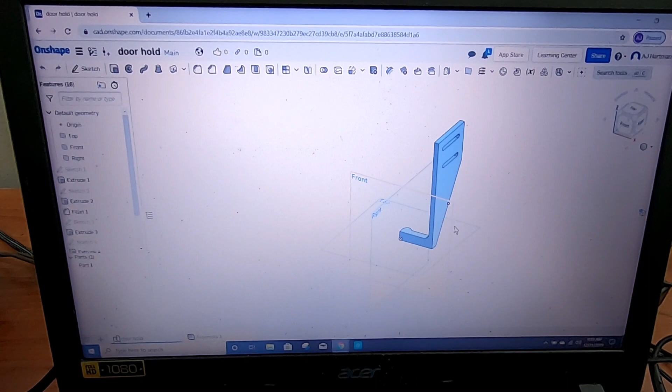A quick example would be this door hold. I was having a problem with the door not staying open against the wall in my shop, so I ended up making this design and then printing out this little bracket. You can kind of see it's pretty much dead on.

So what we're gonna do is search. I kind of already jumped in ahead of time before doing this video. So if you click public, let's search GoPro, and all sorts of brackets and mounts and everything come up.

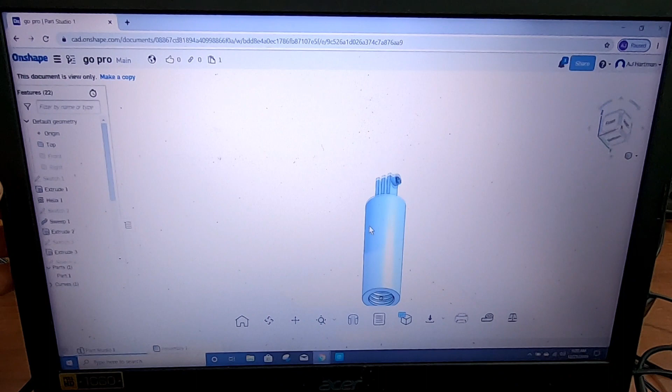Don't really know what you're gonna come across. I originally looked at this one. This one was kind of cool because on the bottom it actually has threads. And looking at the size of it, it's probably like the threads that go on the bottom of a paint pole, like a paint roller. No idea what size or type of threads they are.

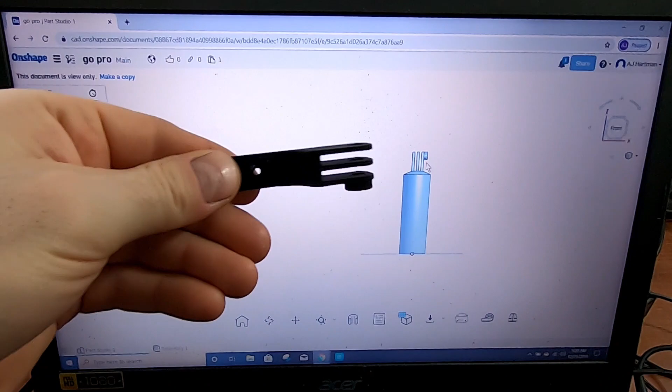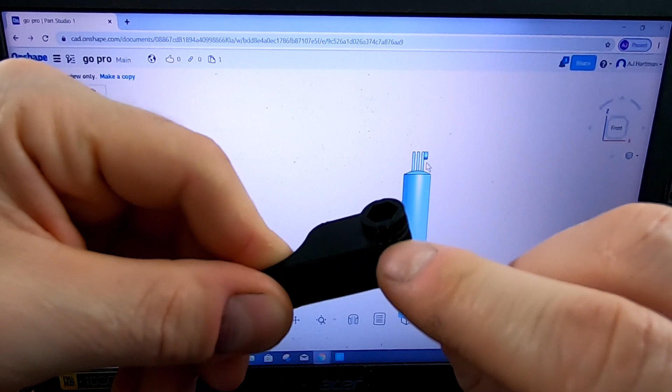The problem with this one is if you look at this overhang right here, I would most likely print it from the bottom up, but this overhang might sag a little bit. A good example of that is these little permanently affixable GoPro mounts that I printed. The bottom of it might be a little hard to see on the camera, but it kind of sagged a little bit right here. Wasn't the cleanest. Wouldn't be terrible, but what we're going to do is find one that might be a little more printer friendly.

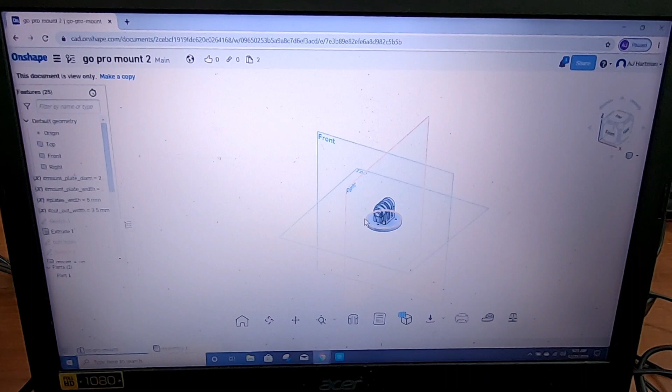And then I noticed this one right here. So what's cool about this one is that in the problem area, you can see they put a nice little fillet or loft or whatever this feature is right here. So when we print it from the bottom up, there's no sharp overhangs or anything.

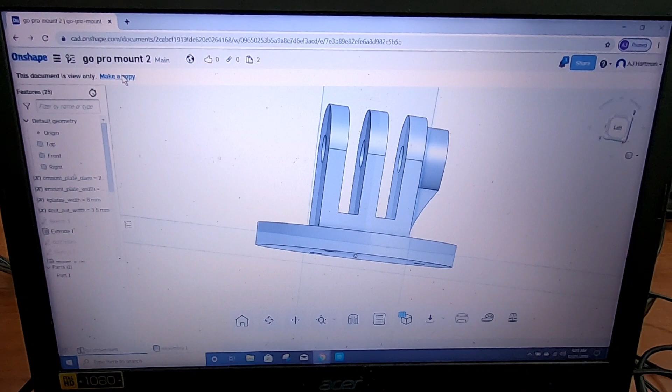So what we're gonna do is make a copy of this one. It tells me to make a public document. And here it is, ready for us to edit and modify as we need.

So let's take a trip back over to our mount, and what we're going to need to do is get an approximate measurement. This doesn't have to be exact, but we're probably going to want it to come out, I don't know, 3 inches before we have the mount sitting there. So this should be pretty easy to modify.

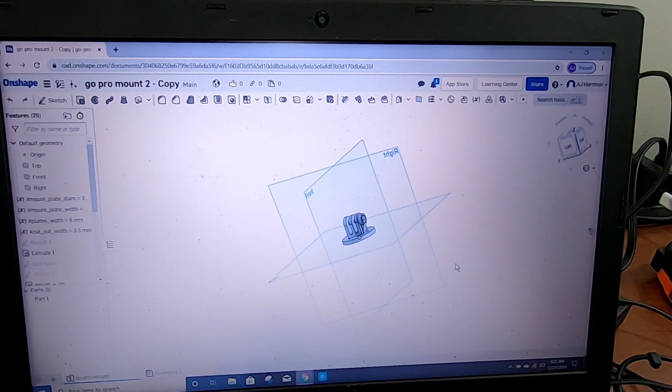Now, I did tinker with this before I did this video just to speed it up a little bit. So what we're going to want to do is add a little bit of height to it first.

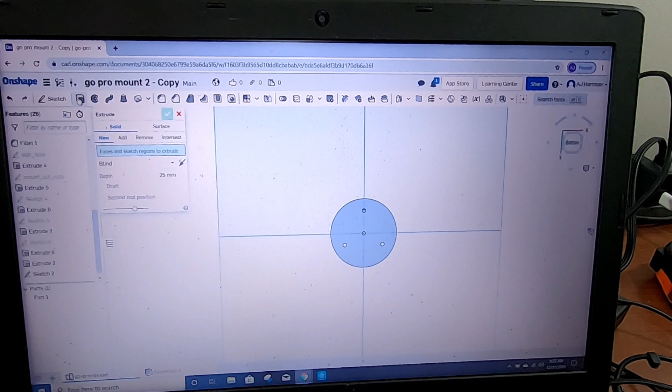We're going to extrude the sketch we just did. I just click over here - you can just click the picture, whatever's easier. Let's bring it up about 15 millimeters. We're going to add it to the existing part, and that's fine.

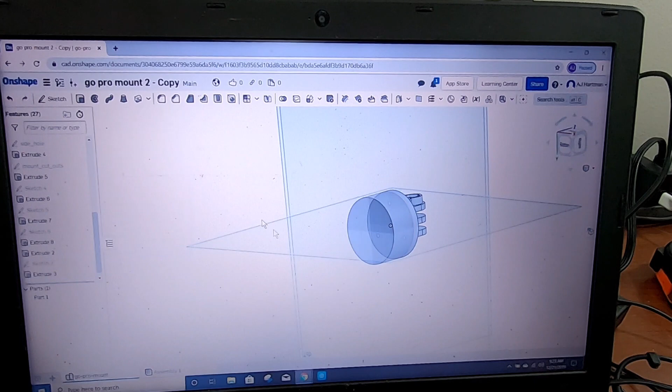Alright, so now we want to make the part of the bracket that comes off of the back and will mount to the tripod right around here. So we know we want it to be about 3 inches.

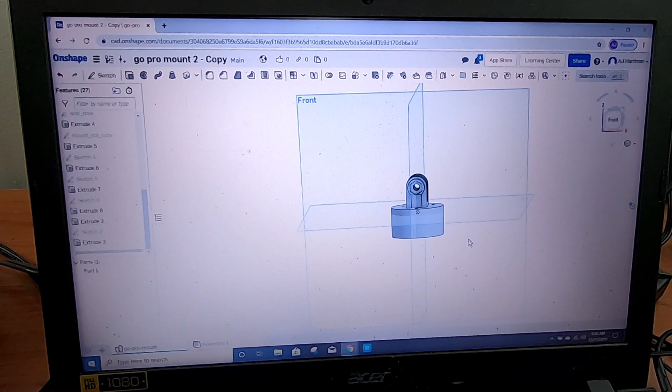This model is in metric, so 3 inches converted to millimeters is 76.2, plus the extra little overhang. Let's just make it 85 millimeters long. Not too critical of a measurement.

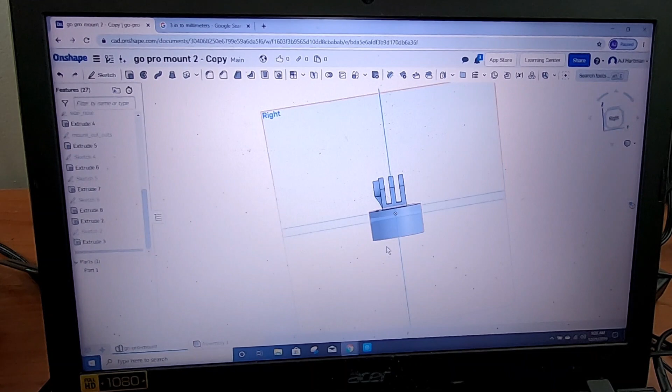So what we're going to do is just kind of add on to this, come back, and it should be set. So we're going to sketch on the plane we just extruded on. View normal, or just hit this cube up here.

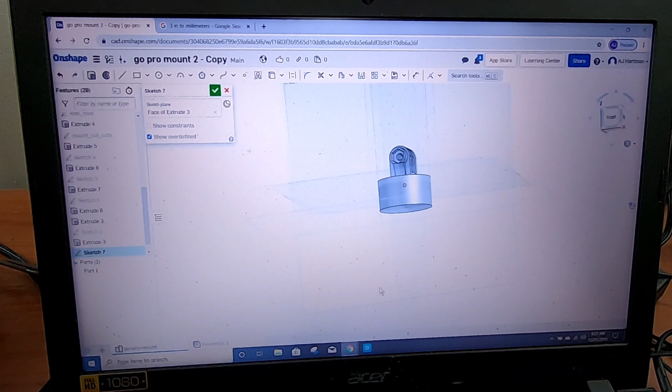So we need to go off to the left. Right now I'm thinking about this - so we know we want it, just make it a little bit bigger.

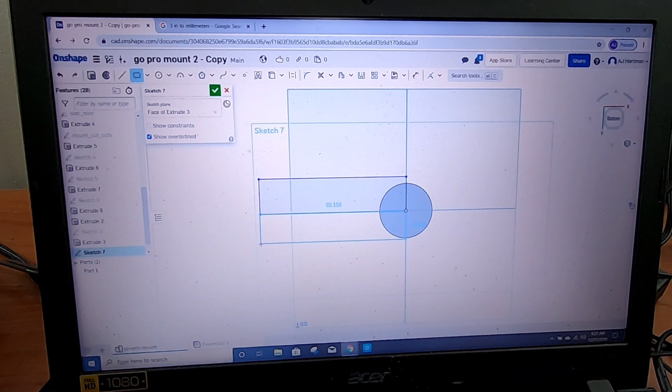Because then we can coincident the edges to the exact diameter. Whoops, wrong one - escape dimension. There we go, so we're at the exact width.

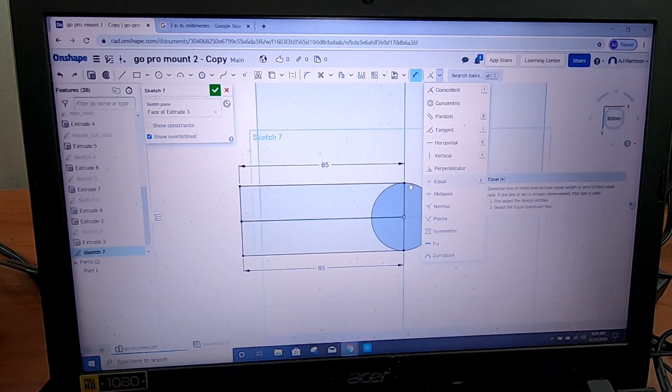I believe we said 85 millimeters - this one will do 85. And again, there's other ways to do it. You could go up here and do equal and click these 2 lines, but everything's blacked out, so we know we are fully defined or fully constrained. I forget the exact term - again, I'm not an expert.

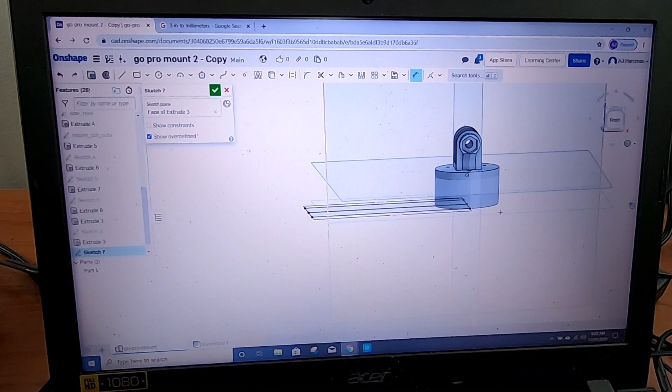So now what we need to do is make this circle, because if we stopped it right now and extruded this down, there would just be a big notch right here. So we will do the circle again, and if we coincident the circle to that, boom, we're good.

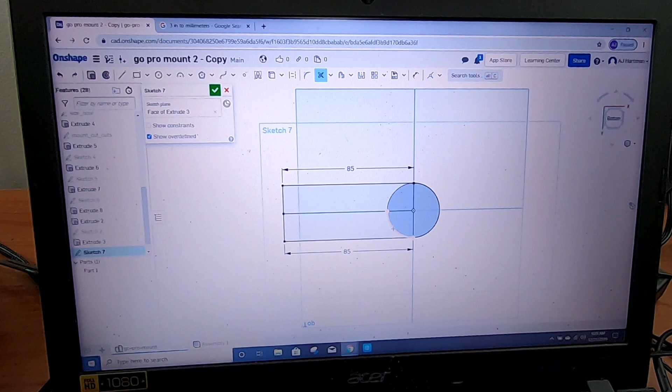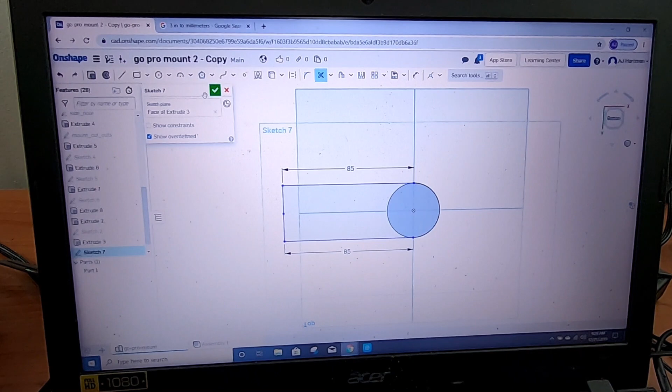Let's try cutting out the unnecessary bits of the sketch. I think we're still good. Oops, we don't need those. Alright, nothing moved - they kind of got unconstrained because they switched to blue, but we know we're okay, so we'll go with it. Confirm the sketch.

Now we need to extrude. I just click sketch 7 over here. Depth - we need to make it. There's not a ton of weight hanging off of it, so 25 millimeters is overkill. Let's just make it a half inch thick.

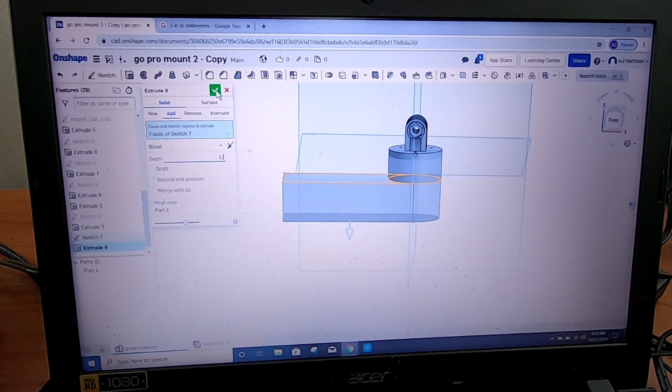And that looks good. Now the last thing we need to do is put a hole right about here, so that way it can go right on the tripod. So once you start measuring stuff, definitely get some calipers, even just a tape measure or ruler if you're doing rough measurements.

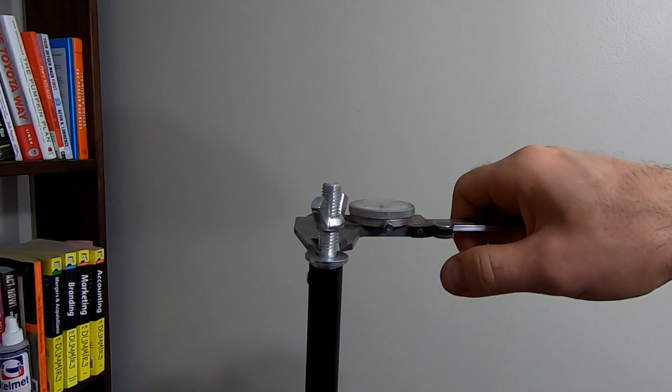So this is a 0.38 something. Okay, so we'll just make the hole 0.4 of an inch, give us a little tiny extra. I did do a calibration cube with this printer, and it's pretty right on whatever you set it to be, but we'll just give ourselves that little bit extra.

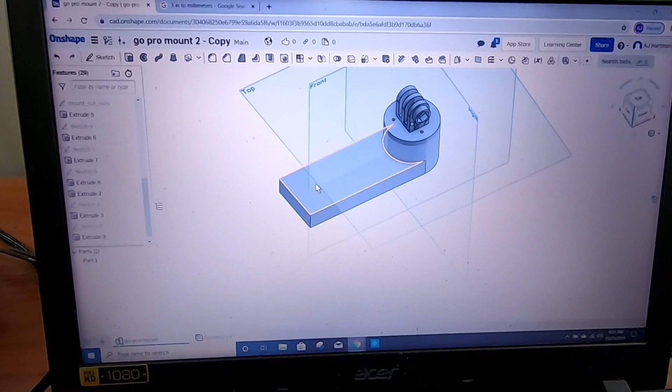So 400 thousandths. Let's go back to our converter - 0.4 is 10.16. So where we want to put the hole, let's just go to the bottom.

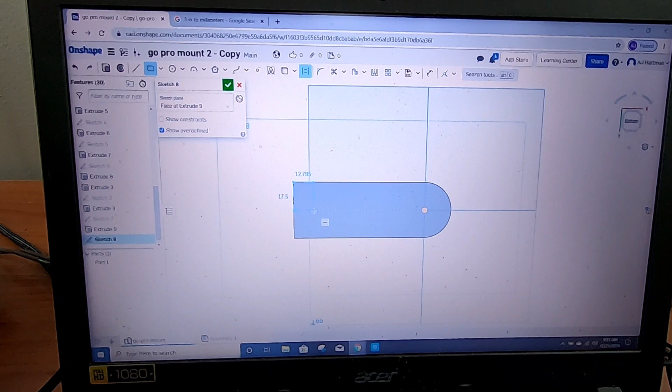You'll sketch on this plane. We will come in, let's do it this way - we're going to do a construction. And again, if you are a little more up to speed with CAD programs, let me know if there's a quicker way to do this. Let's define it - we want to come in a half inch, which is about 12 millimeters.

And we know we're defined to the midpoint. So now we will take it off of construction line. We're just going to make a circle, and escape circle. We remember 0.4 - 400 thousandths hole is 10.16 millimeters.

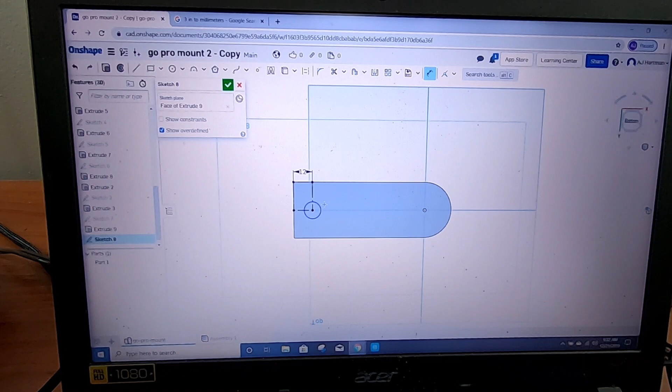So what we need to do is define this. It's actually pretty close to begin with - 1, 6, 5, make it even. Alright, so now we're fully defined. Sketch looks good.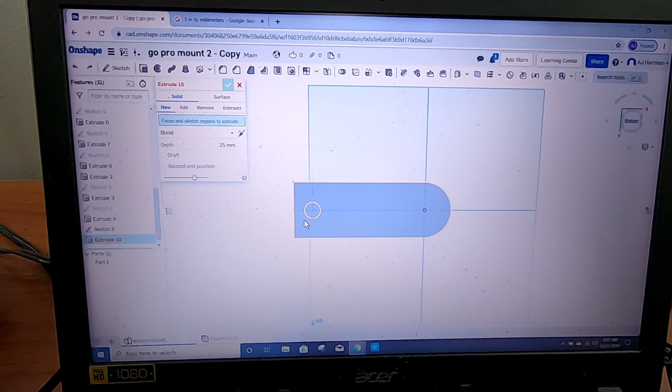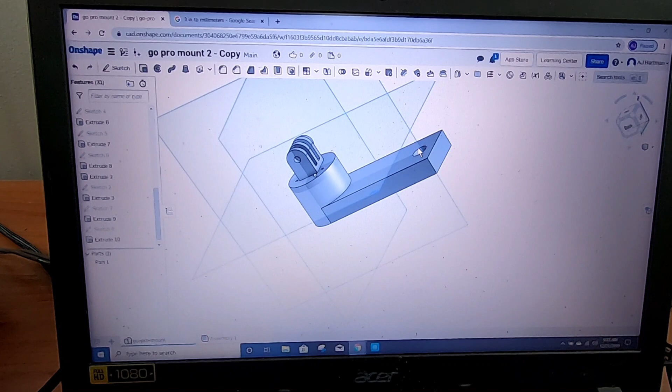Now extrude that sketch. Up here, you want to make sure you hit remove, because we're removing this material from the model. It's going the correct direction already, and that's it. So there we go - there's our bracket. Everything looks good.

Now if you wanted to nicen this up a little bit, let's do that. Let's play with fillets while we're here.

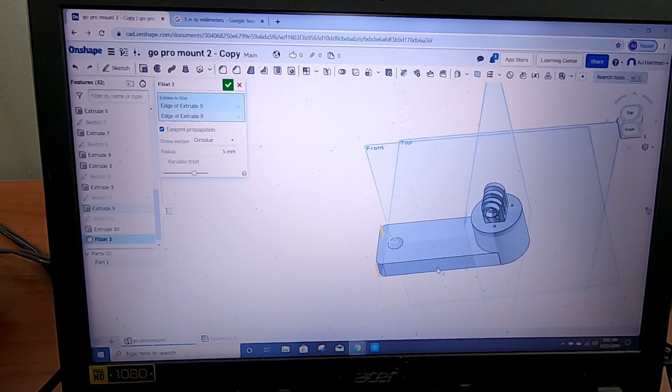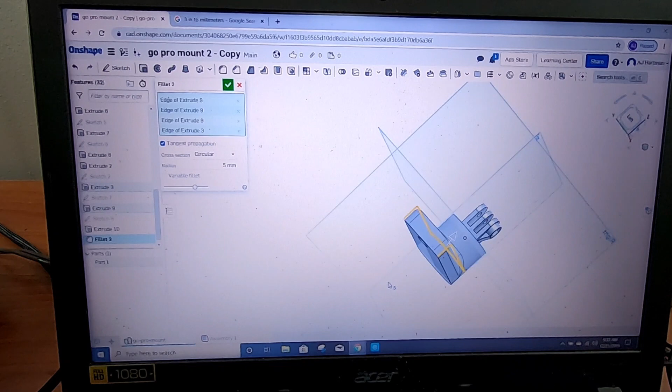So the fillet tool is pretty simple. Just hit whatever corners you want to round. I didn't change the radius or anything, I think 5 millimeters looks pretty good. And then let's beef it up a tiny bit here. So if you fillet an inside corner, it will add material. If you fillet an outside corner, it will remove material. There we go, I think that looks pretty good.

I wonder if we can... there we go. Let's save a little bit of material and time by just taking that extra material off. So there you go, there's our finished bracket.

So now to get this to the printer, down here I usually just hit the tab, export. 3D printers use STL format. I honestly don't know... oh, you know what, we know it's in millimeters. Fine, alright.

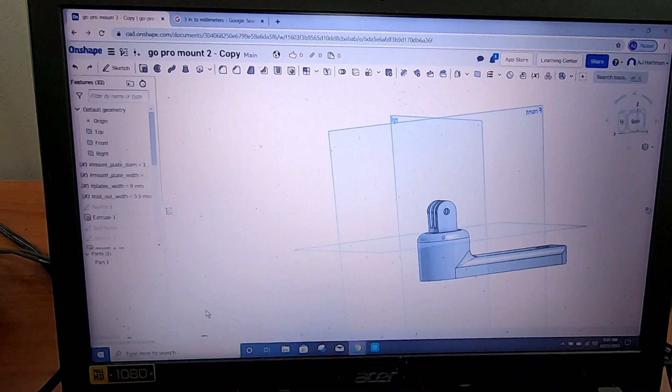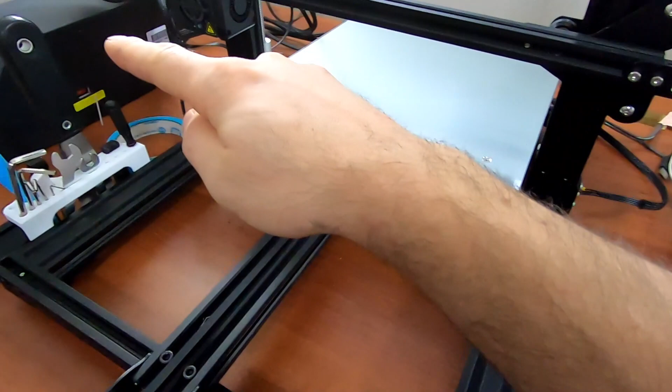So there we go, we downloaded it as a zip file. The printer comes with this little jump drive that you plug into the printer over there. I still use that - you can hook it up with a cable and do this a little more easily I think, I haven't tinkered with it yet so I'm a little old school. So, GoPro mount, drag it to the disc. Find it. GoPro mount. Extract. We gotta remember it's GoPro mount because I did some other GoPro prints and don't want to get them mixed up. There you go, looks like what we just made.

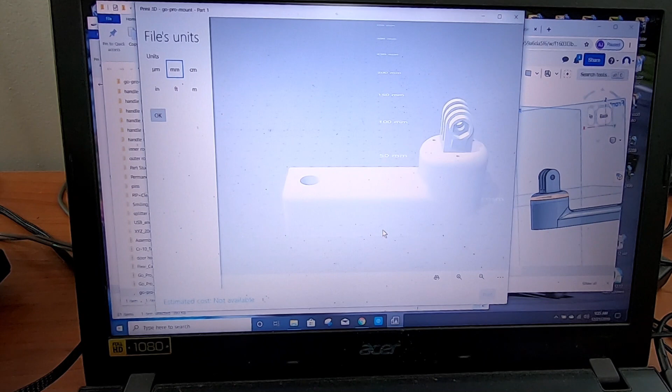So now I get out of all this, and Creality gives you a slicer with the printer. That's what I use, there's a bunch of other ones. Again, somebody who's a little more of an expert at 3D printing, or if you're printing fancier stuff, you might want more options over here. But this works for me for now.

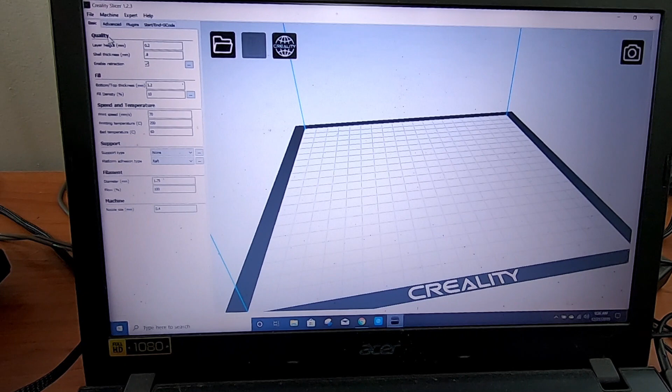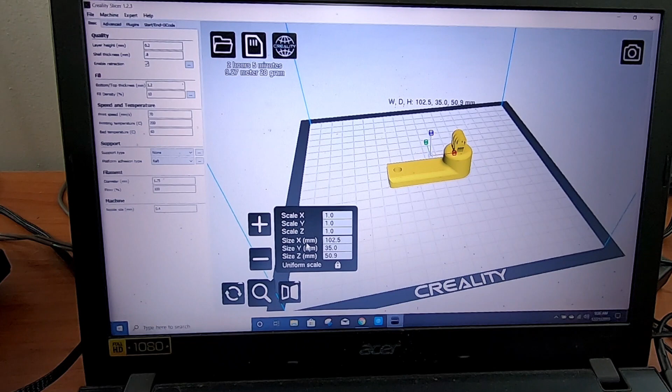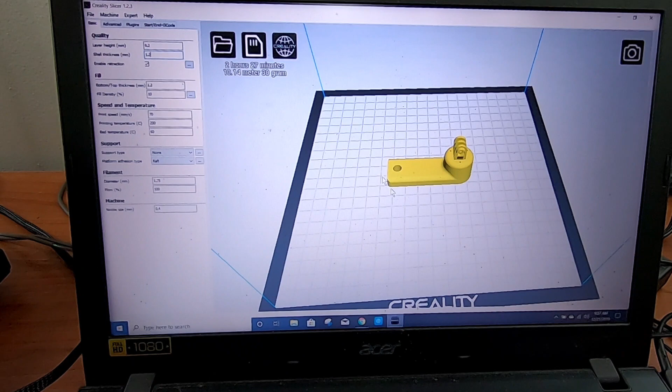We know it is the GoPro mount. Size looks correct - sometimes it will download in the wrong scale or measurements, but since we did everything in millimeters and this is in millimeters, everything looks good. Centered on the platform. We don't need it to be super smooth or anything, so we'll do 0.2 layer height. We want to strengthen it up a little bit and do a 3-layer wall thickness. And this will take about 2.5 hours to print. All the other settings, I don't really change them too much. I do print with a raft just so it lessens the chance of the part sliding during the print. So let's see, everything looks good.

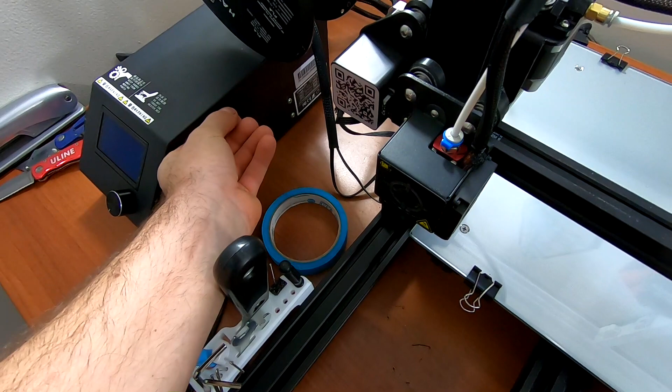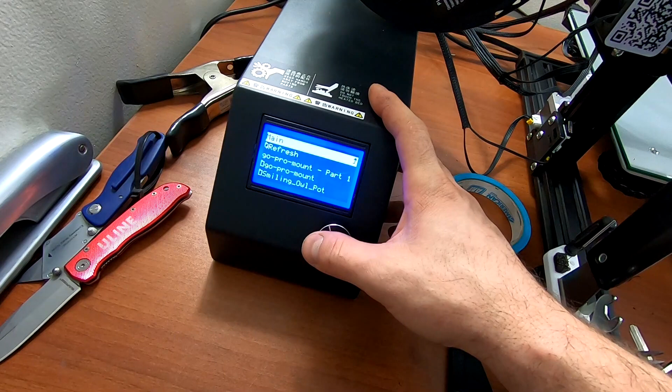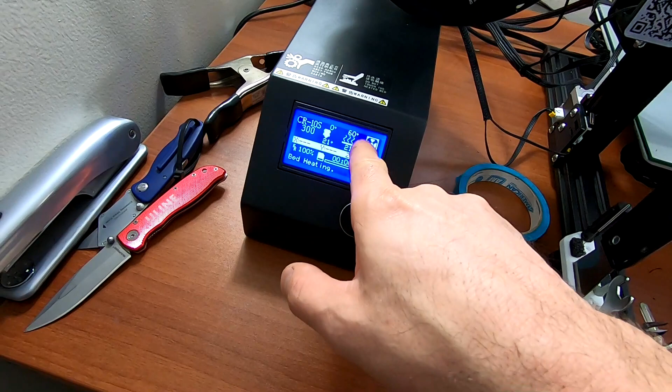So there we go, toolpath to SD. GoPro mount part 1, eject it. Alright, print from SD, GoPro mount part 1, and then you'll see it's putting the bed temp up to 60 degrees Celsius. Once that gets up to temperature, the nozzle goes up to 200.

So, those are the settings that the printer told me PLA will work with. It's what I've been printing on since I got the printer. Again, I'm new to it, so I haven't ever tinkered with different temperatures to test strength or anything. But again, I'm not really printing end use parts, so that isn't the biggest concern for me. And this bracket we're doing is only going to hold a GoPro that's a couple ounces, so it shouldn't be too much of an issue.

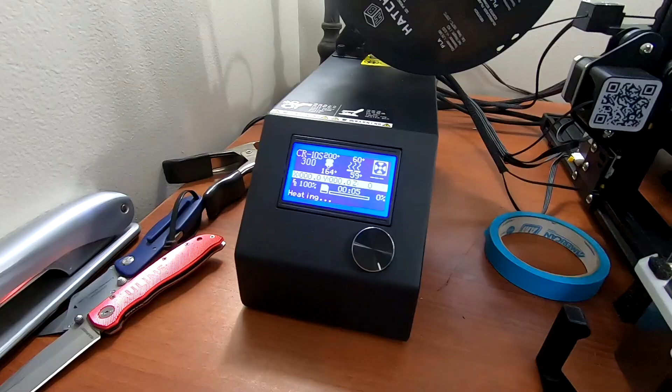So what we're going to do is let this warm up, and then I'll video a little bit of it printing and then the finished product. So I think that's it for this moment. This is the boring part, waiting. The printers aren't super fast. Alright, so we're getting there. Bed temperature is where it needs to be. Nozzle temp is coming up. So as soon as it hits 200, it kind of just starts doing its thing.

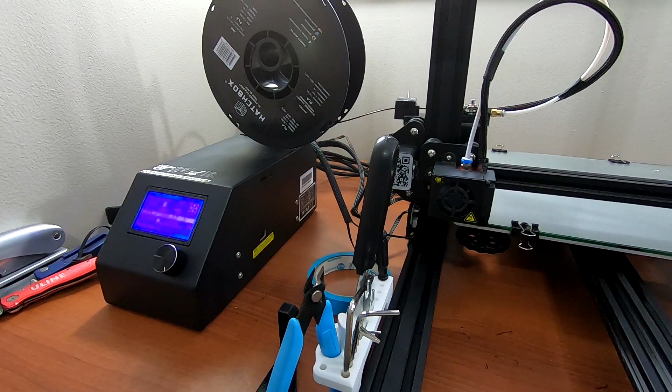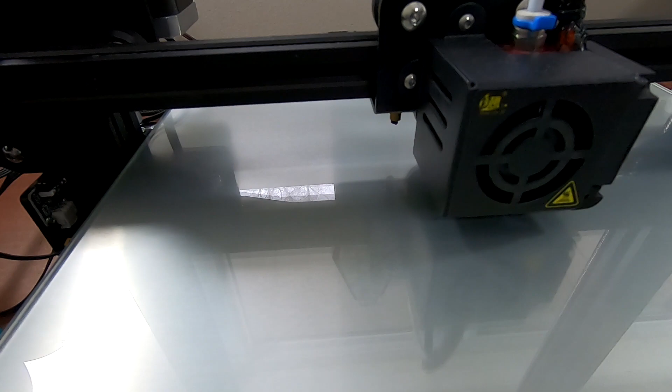There it goes. Alright, so right now the print has started. It's just doing the raft, which adds a couple minutes to each print. So yeah, I guess I'll try doing a photo lapse on this, we'll see if it works or not. And then, yeah, we'll see the finished part, and I'll go ahead and mount it to the tripod.

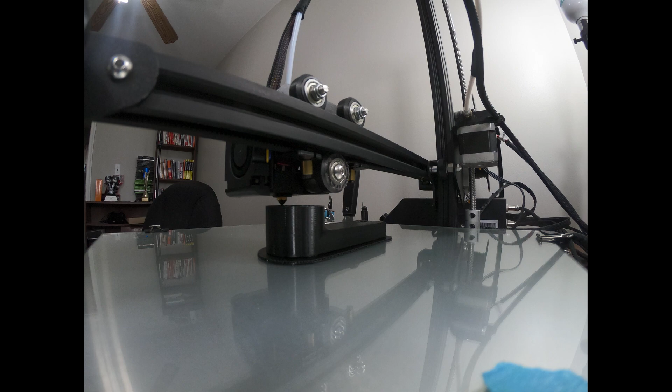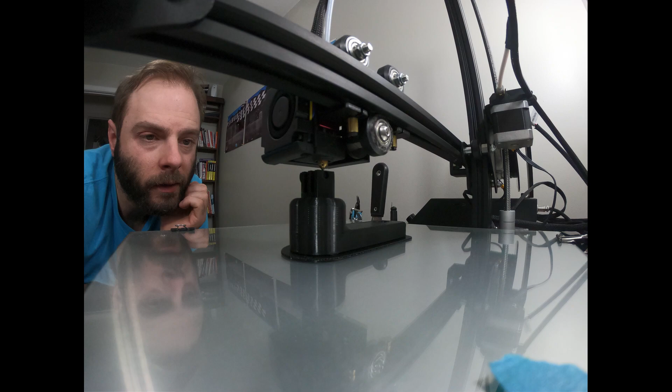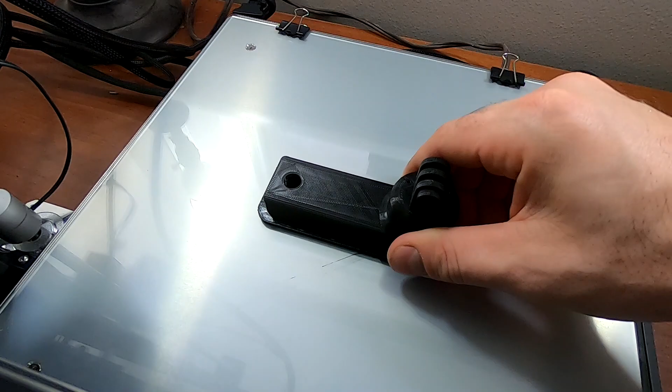Alright, so here it is, all done. Should just come right off pretty easily. Now the raft I was mentioning earlier is this bottom layer. It's printed out to give the print more surface area, to lessen the chance of it getting knocked loose during printing. It prints in a way where the adhesion between the two isn't that great, so you should just be able to pull it off. This is just scrap or trash, and then there's our part.

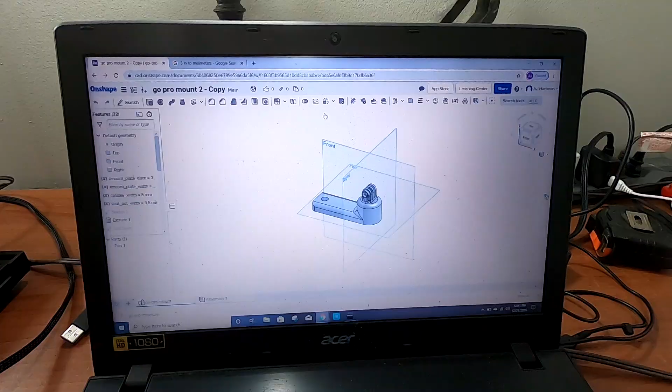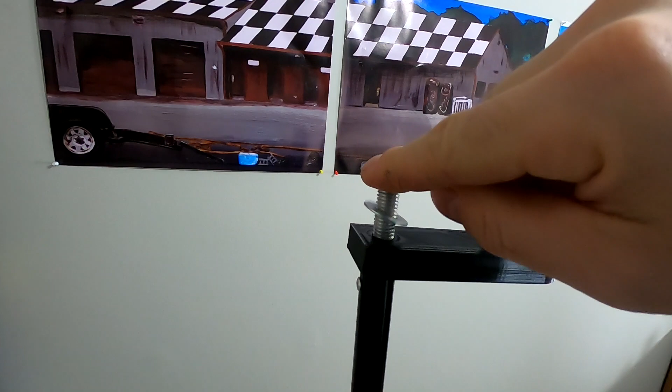Alright, so there it is. Pretty much identical, well, it should be identical to what we made. So now what we're going to do is take this and it's just going to plop right on here. It's a good thing we added a little bit of diameter to this hole, because you can hear it's actually pretty snug. But that's what's cool about printing a hole, we don't have to do any post processing, we don't have to drill this hole or anything. The bolt itself, I'll probably redo this, just drill a hole and put an actual bolt through it rather than this little tiny rivet. But there it is.

Let's grab the GoPro. Now here is a prime example of why I kind of want to get this, because right now this camera is just sitting on a shelf that isn't quite the right height. The light might not be correct, but you kind of get the idea.

So the little nut that comes on them should fit right in here, and it does. It actually fits pretty perfect, a little bit of snugness to it. This fits in here nice and good, I don't have to force it.

Alright, so something I do have to change or adjust real quick. These holes, when holes get printed this way, they get printed much more accurately than this way. It might be really hard to see on camera, but it's a tiny bit too small because the layers as they come in go a little bit too far. I can adjust that on the next print, or since it's a hole, it's easy enough, just run a drill bit through it. Alright, so we got the drill bit.